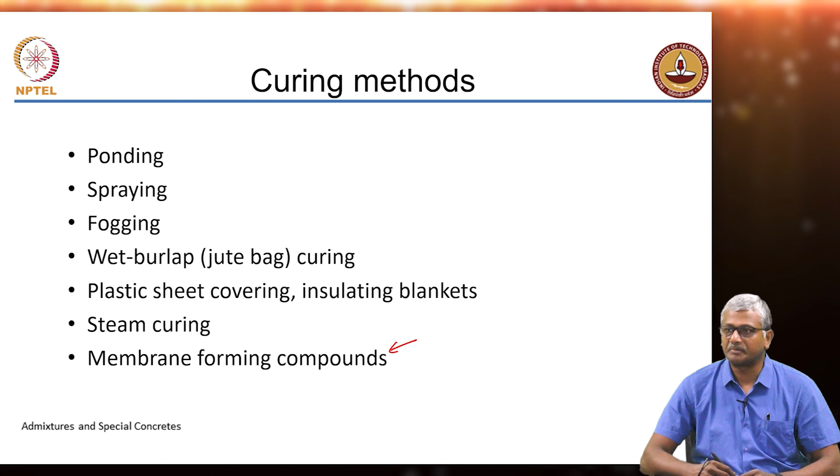Right. So, just to move on, we know that we have to cure concrete for attaining a specific level of strength. Now, how much do we cure it, right? The idea of curing, again, I think I had emphasized this previously also, is primarily to actually produce concrete that is durable. Rather than strength, curing has to impart durability to the concrete, and that is where we really need to ensure that at least some level of strength has been ascertained in the concrete before we can stop curing. Typically 70% is the usual thought process.

Now, what happens with 70% is that for modern cements, the concrete strength at 70% is typically attained by about 7 days, and you will rarely see that in sites curing beyond 7 days is actually practiced. Now, you have certain circumstances in which concrete needs to be cured for much longer, and this can happen when you have concrete which has a very low water to cement ratio, where internal desiccation or self desiccation can be quite a realistic problem in the beginning.

So, other aspects that you really need to worry about with respect to curing: the considerations for durability, not just attainment of strength, but also durability is important. The type and size of the structure. Usually for structures that are very large, the effect of lack of curing is not as critical as for structural elements which are very small. For instance, if you compare a beam to a dam, right, the effect of not curing on the beam is much greater than the effect of not curing on a dam.

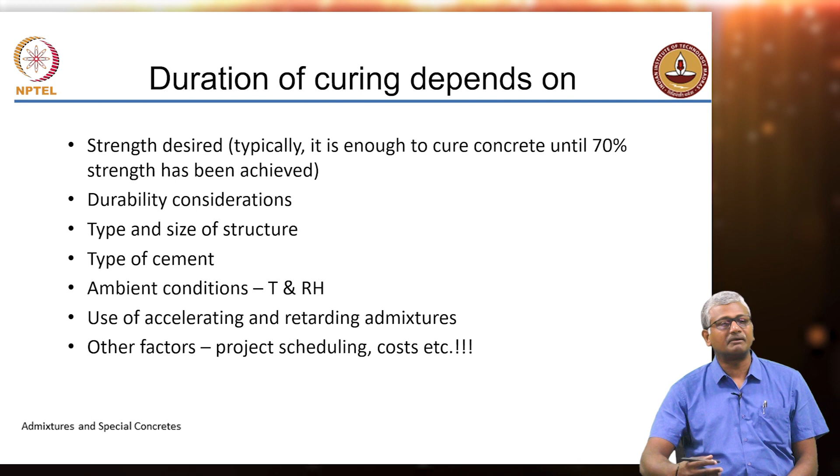Durability depends on interconnectivity of the porosity, right? So, with more hydration, you are going to break that interconnectivity, and when you have less interconnectivity, you have less permeability. So, obviously, you have better durability. Okay.

Now, cement setting time is measured in the lab using your Vicat apparatus, right? But the concrete setting time is not exactly the same as setting time of cement. Cement in concrete obviously undergoes hydration reactions, because of which it leads to setting, but the presence of aggregates and the environmental conditions wherever concrete is actually cast also have an effect on the setting process.

So, you need to actually develop methodologies by which you can predict or at least measure the setting of cement and concrete on site. This is important from what perspective? Obviously, from the point of view of concreting operations, you need to ensure that you are finishing your surface of the concrete much before the initial set happens, because after that you really are not able to mold the concrete in the specific shape.

Secondly, you want to know the final set, because beyond that point concrete dimensions are not going to change significantly. So, you can start removing the shutters which are on the sides, for instance. So, you have an obvious necessity for understanding the setting time of concrete from the perspective of planning your concrete operations. Okay. So, please remember, concrete setting time is different from cement setting time.

Why do I say this? Why should concrete set at a different time than the cement? Oh, you are saying chemically the silica and the aggregates may affect the setting. But yeah, possibly, but less likely. How do you measure the setting time of cement? Sorry? Yeah, apparatus is fine.

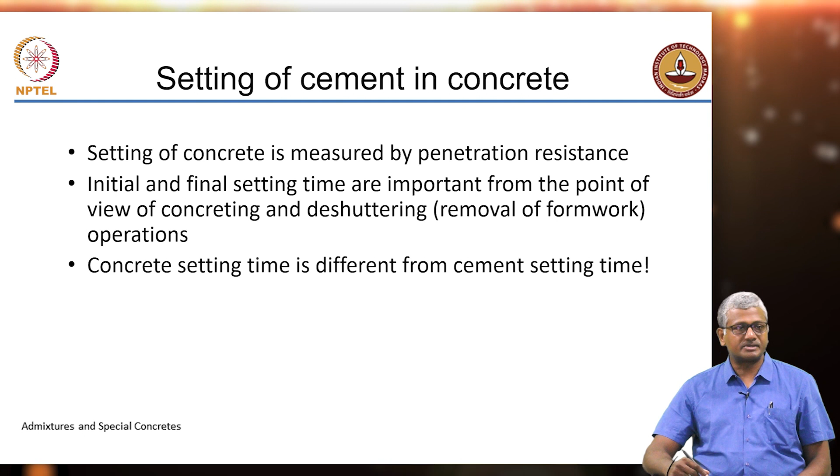Right. So, now just let us briefly look at hardened concrete. It is not going to be a very detailed discussion, because it is quite simple to understand the basic properties of hardened concrete. The first and foremost characteristic is that concrete is excellent in compression, but poor in tension, right. So, we are really interested only in the compressive strength of the concrete.

For all practical purposes, for reinforced concrete members which are subjected to any kind of tension, we believe that concrete in the tensile zone is, sorry? No, concrete is weak in tension, but how do we design reinforced concrete members like beams?

There is no contribution to the tensile resistance by the concrete. We give all the contribution to the steel. So, in essence, concrete may as well be cracked in the tensile region, right. Now, obviously, if concrete is getting cracked, then we have to worry about crack widths. Depending on the environment of service, we have to ensure that we select enough steel to ensure that the concrete cracking does not open up too much.

Why does steel have an effect on concrete crack opening? No, the cracks will allow penetration of external agents to corrode the reinforcement. But why is the steel controlling the crack width? No, how is the steel controlling the crack width in concrete? No, cracks are going to propagate in concrete as soon as the tensile capacity is exceeded. But the cracks are not going to open up because I have steel present. Why?

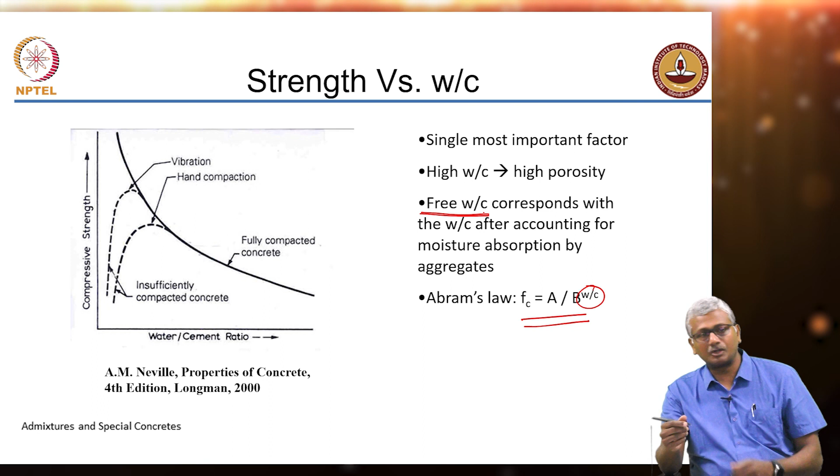Okay. I have a slide on this aspect about specimen geometry. You test a cube and you test a cylinder, you get different strengths. Why? Sorry? Cylinder? Slenderness. Oh, slenderness is only a problem if your length to diameter ratio increases significantly. No? What did you learn in structural engineering? At what L by D is slenderness a real problem? L by D should be more than 12, right, but your specimen is only L by D of 2, right, 150 mm diameter typically is 300 mm height, 100 by 200.

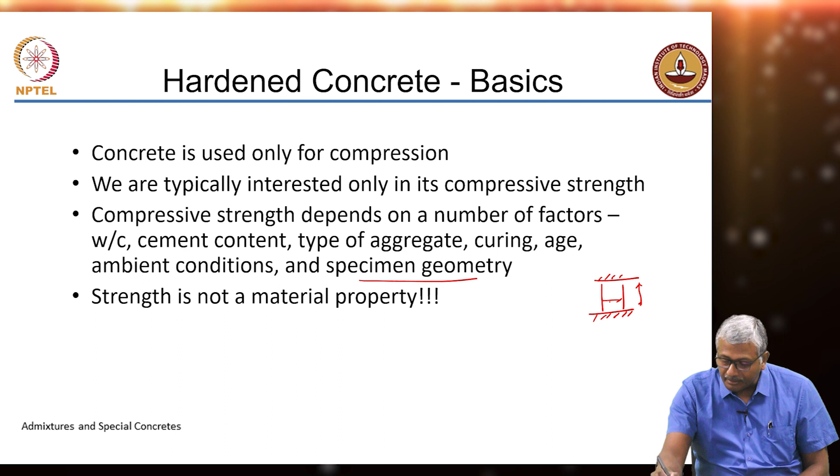So, why does a cylinder then produce lesser strength than a cube? You have a confinement effect of the end platens, right. You have the platens between which your specimen is getting loaded. If the specimen height or length is not too much more than the width, then the confinement effect is felt throughout the length of the specimen, and that confines the specimen from bulging outwards and cracking. So, how does concrete fail when you compress? It bulges outwards and cracks, right. Rather than crushing, it bulges outwards and cracks, because of the tensile capacity in the lateral direction getting exceeded.

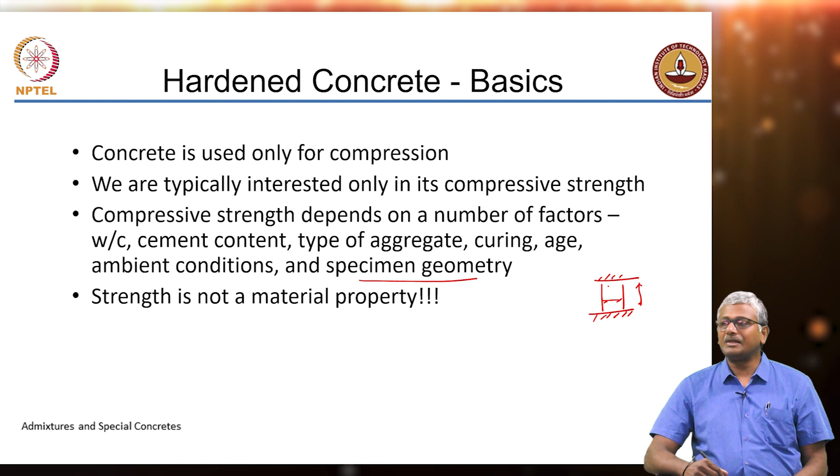So, when you have confinement because of the frictional effect of the platens, it restrains that bulging outwards, and because of which you end up with higher strength in the cube, because the effective L by D in a cube is 1, in a cylinder it is 2. So, because of that you do not get any pure compression in the cube, right.

Anyway, let us come back now to the tensile strength of concrete. Of course, it is only in some cases that we actually go and test the tensile strength. For instance, when we have concrete pavements, the flexural strength is often a performance parameter required to judge the performance of pavements, right. Rather than compressive strength, concrete pavements rely on the value of concrete flexural strength. So, it is important to judge how the concrete is going to behave in flexure, and sometimes even the cracking potential needs to be judged.

For instance, when you have a case of thermal expansion or contraction of the concrete, that is going to lead to tensile stresses in the concrete. You want to know at what tensile stresses concrete failure is likely to occur, right. So, generally as a thumb rule, the tensile strength is around 1/10 of your compressive strength. When you test it in flexure, it is probably about 1/7. So, let us say you have a 30 megapascal concrete in compression, the flexural strength will be around 4 megapascal.

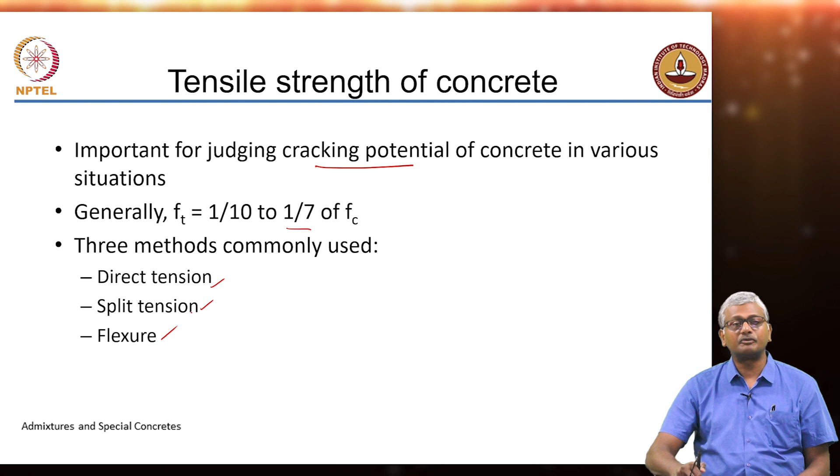If you do a split tension test, when you use a cylinder to test the split tension, you will get even lower strength than that, typically around 3 megapascals, right. So, we can use a direct tension, a split tension or a flexure test depending on the type of standard or type of specification that prescribes the choice of flexural strength.

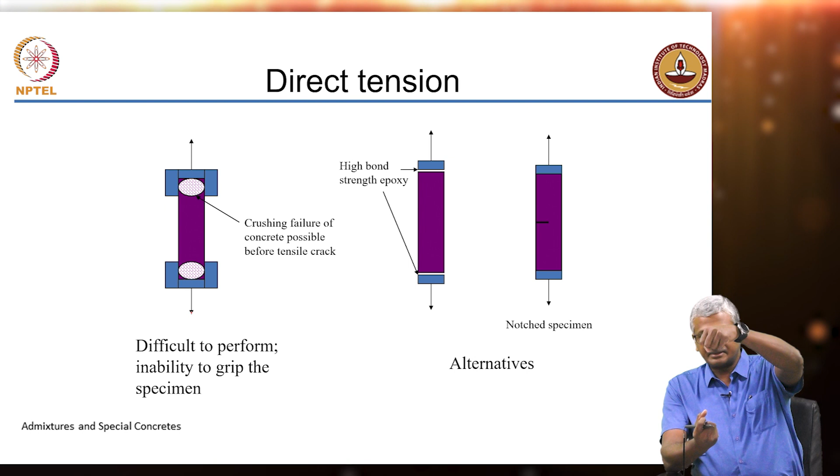Direct tension is not that easy to perform because concrete specimens have to be at least 3 times the size of the aggregate. If you are using 20 mm aggregate, you should use at least a 60 to 75 mm size specimen. Such a specimen, if you try to grip at the ends, that may lead to a failure of the concrete by crushing at the ends rather than the tensile failure of the concrete itself. So, you may want to sometimes use a high bond strength epoxy at the ends to pull off the concrete, but if your epoxy is not strong, the failure will happen at the epoxy and you will not really have any failure in the concrete.

The other thing is to have a notch, but then again you are not testing a true tensile strength of the concrete, you are actually testing its crack propagation ability. It is not exactly tensile strength, you have other factors at play there also, the sharpness of the notch and so on and so forth.

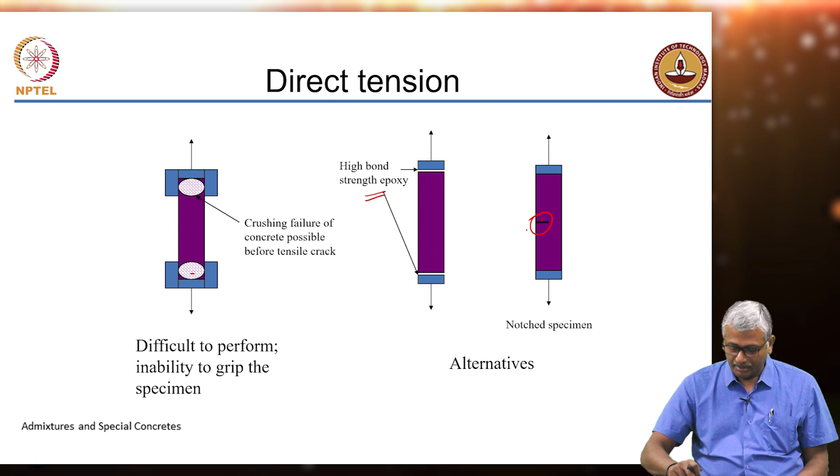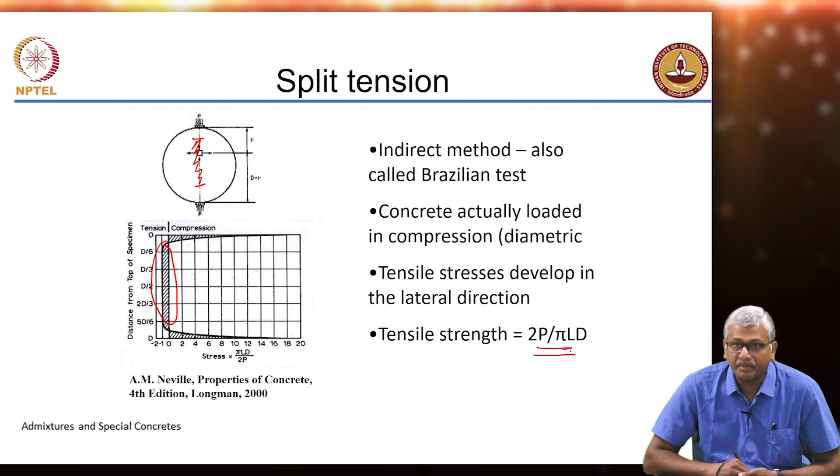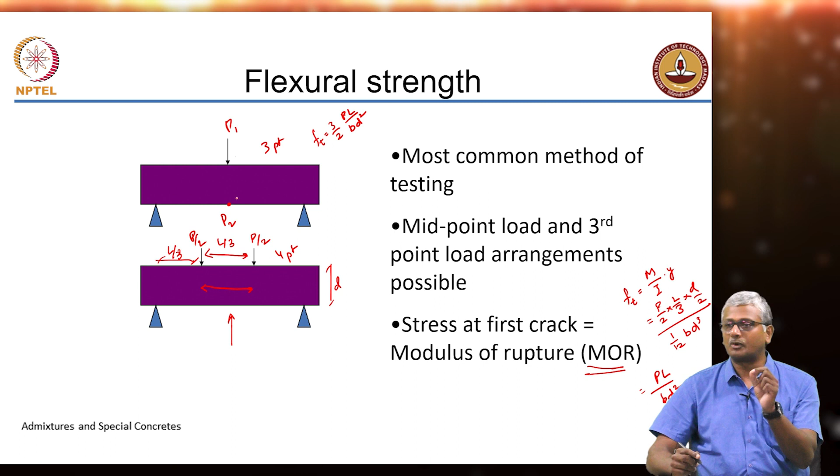Okay. There may be some differences because of the presence of some shear, because only exactly at the center here you do not have any shear. So, if your crack is exactly at the center, then you have an infinitesimally small zone of pure bending, otherwise you will have effect of shear also.